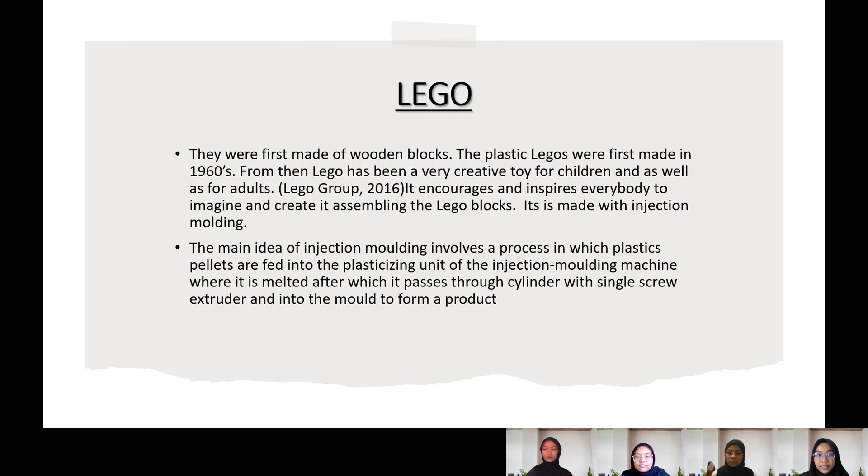How Legos are made: it is from injection molding. The flow process, step 1: the mold closes. As the mold closes, the injection molding cycle timer will begin.

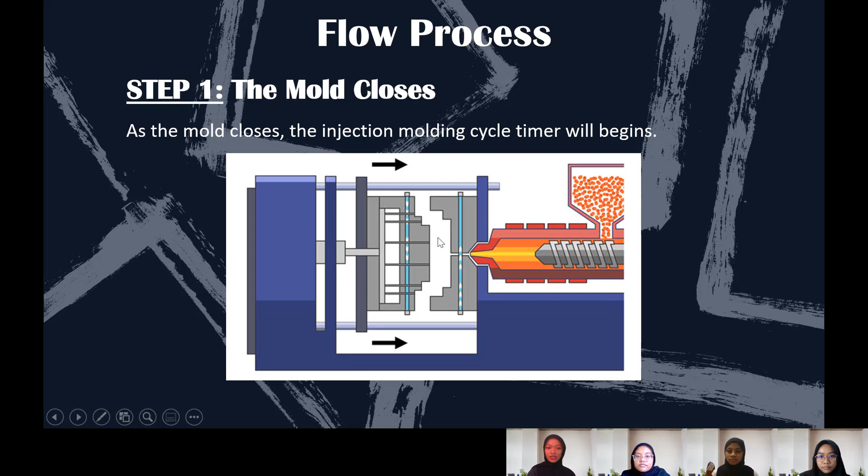The next step will be injection. The plastic is heated and injected into the mold. The displaced air escapes through the vents in the injection pins along the parting line as the melted plastic enters the mold.

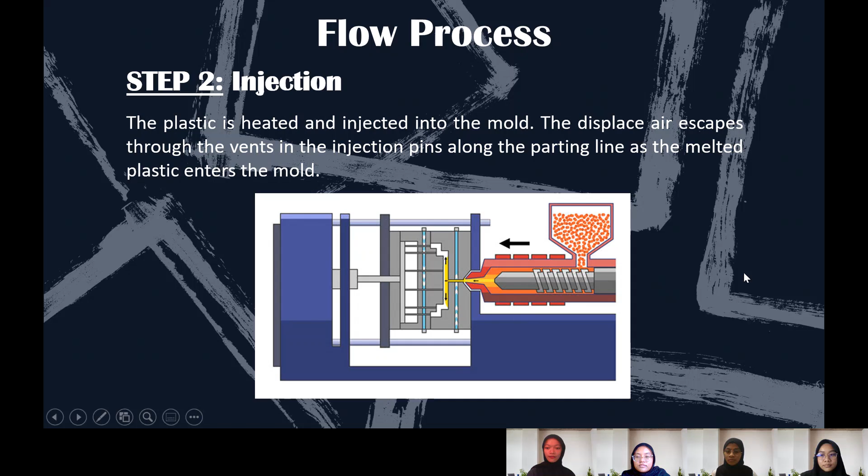Step 3: cooling. The part will be allowed to cool for an exact amount of time needed to harden the material after the mold is filled. The type of resin used and the thickness of the part affects the cooling time needed. To maintain constant temperature, each mold is designed with internal cooling or healing lines where water is cycled through the mold.

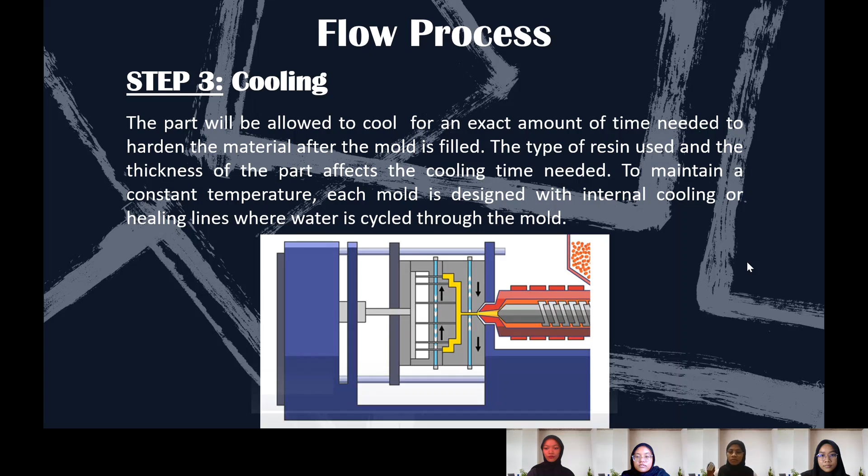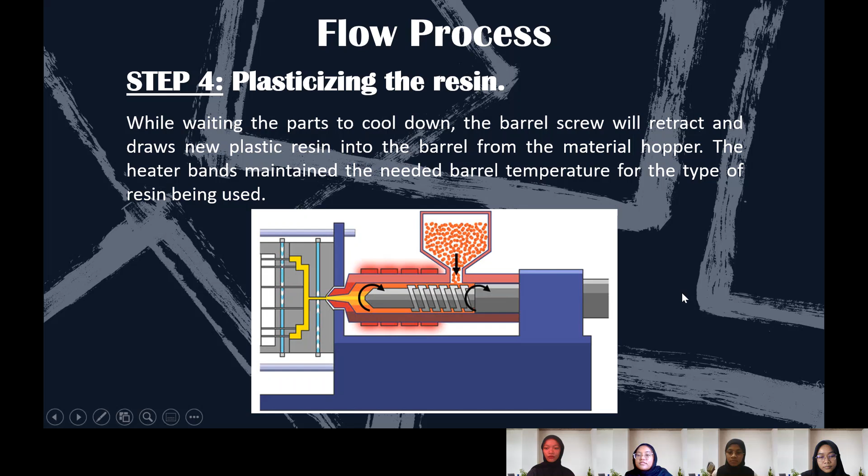Step 4: plasticizing the resin. While waiting for the parts to cool down, the barrel screw will retract and draw new plastic resin into the barrel from the material hopper. The heater bands maintain the needed barrel temperature for the type of resin being used.

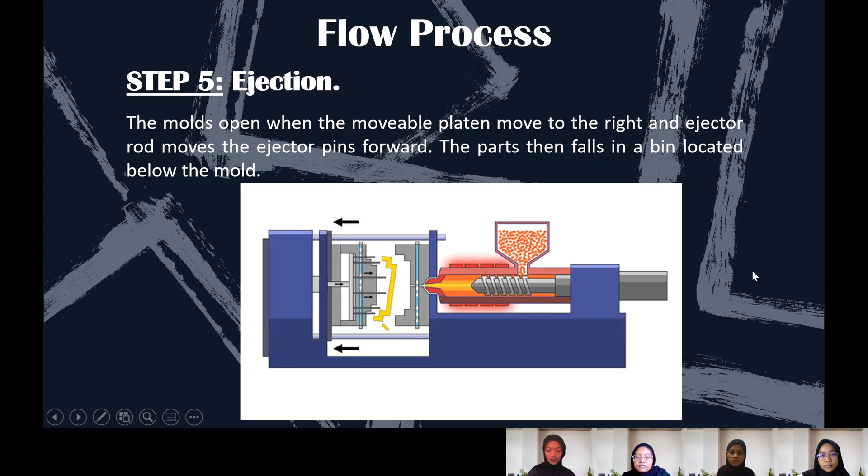The last step is ejection. The mold opens when the movable platen moves to the right, and the ejector rod moves the ejector pins forward. The parts then fall into a bin located below the mold. So there you have it, the injection molding process of Legos. Next, I will hand it over to Nur Khairina.

Thank you, Alia Maisara. Right now I will explain about control parameters. For the temperature, inside the molding machine, the granules are superheated to a temperature of about 450 degrees Fahrenheit, which is 230 degrees Celsius. This melted plastic goo is fed into molds, which are little metal containers shaped like hollow Lego bricks.

As Alia explained earlier about the process, there is running water which is used as a coolant for the process. So the cooling time takes about 10 to 15 seconds to cool and eject the Lego from the molding machine.

And for the speed, we can say that about 2.16 million Lego elements are molded every hour, or 36,000 per minute. The Lego manufacturing process is so precise that only 18 out of 1 million Lego bricks produced are considered defective. So the injection velocity is about 200 to 240 millimeters per second.

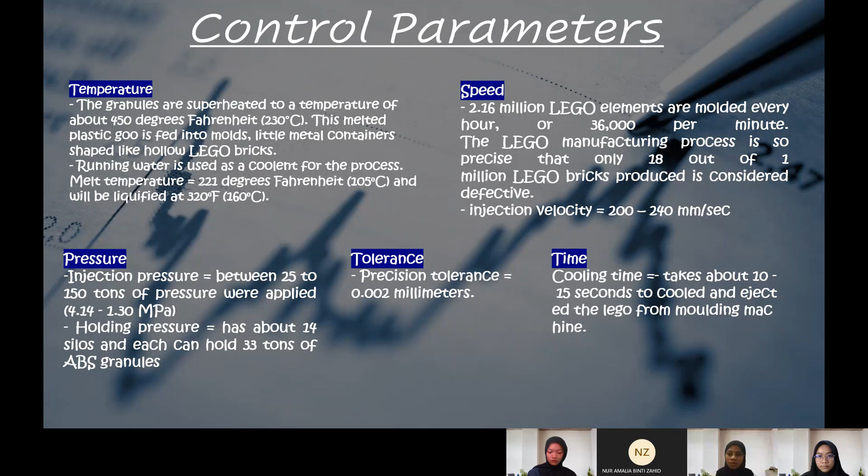And the precision tolerance is 0.002 millimeters, which is related to the applied pressure during the injection process. This is done to snap together all of the complex pieces using the machine. I will pass the next slide to Iman Christina to explain about safety.

There are lots of safety procedures, but here are some of them. First, check if the emergency button is pressed or the safety door is open during operation. Second, the molten rubber leaking from the nozzle should not be removed by hand, to prevent the hand from being sandwiched between the shooting table and the mold when the shooting table is moved forward. Third, avoid leaving heat-sensitive and corrosive plastics in the barrel for too long.

Observe the shutdown and cleaning methods provided by the plastic supplier. We need to make sure that the mixing of new and old plastics doesn't produce chemical reactions when replacing the plastics. Otherwise, other plastics must be used to remove the old materials in the barrel.

Fourth, before operating the injection molding machine, it must be checked whether the mold is firmly installed on the movable platen and the head plate of the injection molding machine.

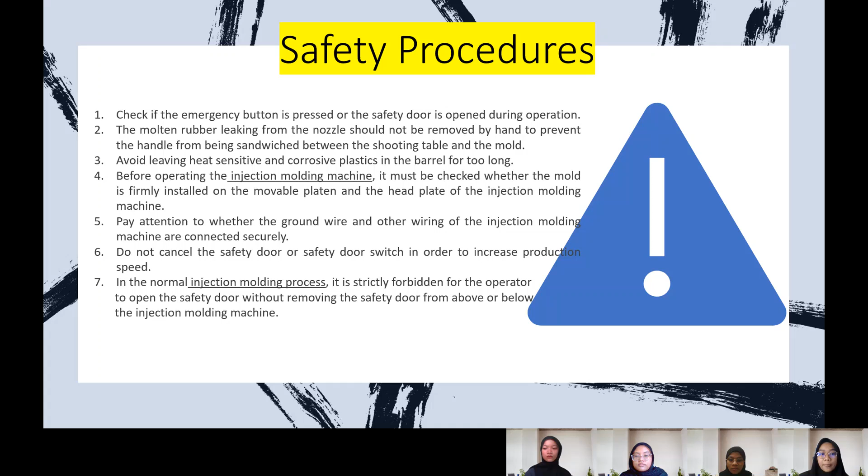Next is advantages and disadvantages of the injection molding process. First advantage is low labor cost. Plastic injection molding is an automated process where a majority of the process is performed by machine and robotics, which a sole operator can control and manage. Automation helps to reduce manufacturing costs as overheads are significantly reduced.

Second is design flexibility. The molds themselves are subjected to extremely high pressure. As a result, the plastic within the molds is pressed harder and allows for a large amount of detail to be imprinted onto the part and for complex or intricate shapes to be manufactured.

Third advantage is fast production and high efficiency. Injection molding can produce an incredible amount of parts per hour. Speed depends on the complexity and size of the mold, anywhere between 15 to 120 seconds per cycle time.

The last advantage is having a large material choice. There is a large selection of polymer resins to choose from. Multiple plastic materials can also be used simultaneously. For example, TPE can be overmolded onto PP parts.

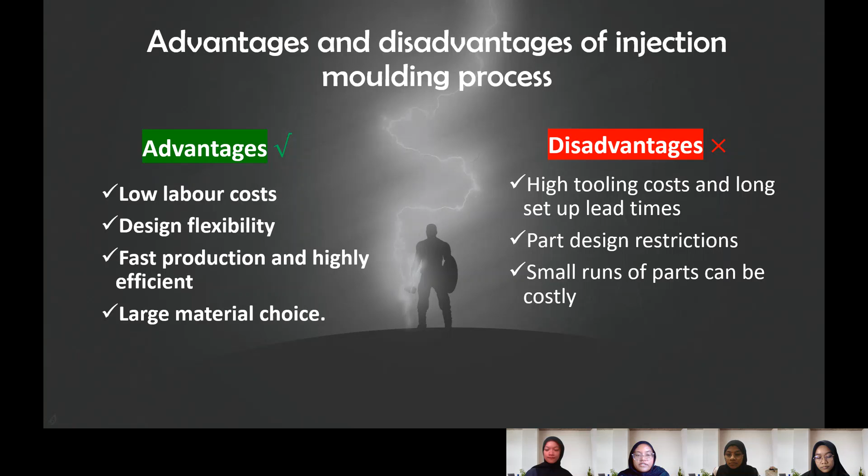Okay, so on behalf of my members, what I can conclude from what we presented just now is that injection molding is considered the most important process in the production of plastic items, which involves intricate shapes and vast production of identical items. It also has many applications for manufacturing, particularly for producing high volume parts. While the tooling and molding can be expensive, the cost of production once it is completed is low.